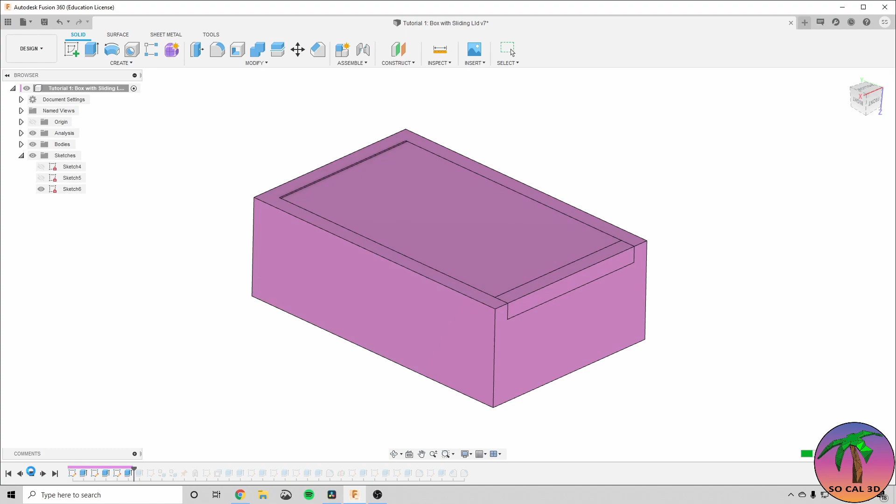That's perfect, because in today's tutorial we will be learning how to design a box with a sliding lid in Fusion 360, no prior design experience required. This box requires no support and prints in a single piece. If this is your first time with Fusion 360, I recommend simply copying and not worrying too much about the details. They will come with time.

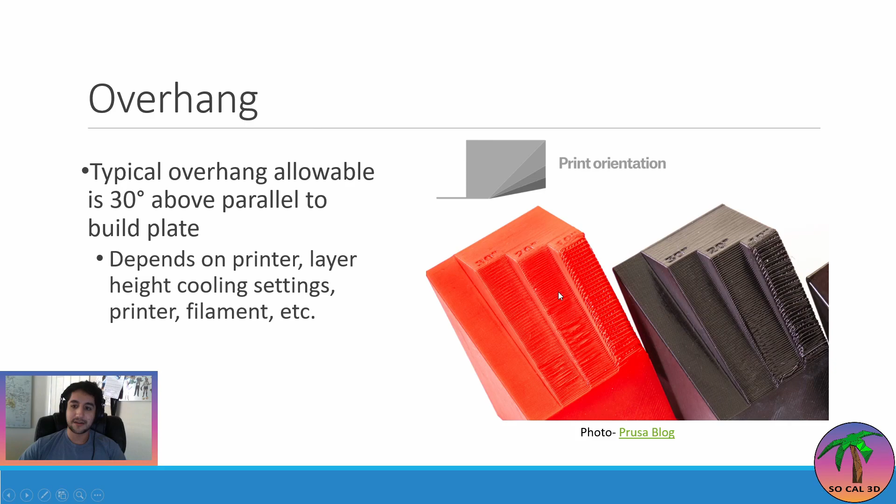In this picture, this is the surface that printed on the print bed, like shown right here. And then we have different degree marks: 45 degrees, 30 degrees, 20 degrees, 10 degrees. A typical overhang allowable is around 30 to 45 degrees. That's going to depend on your printer, your layer height, your cooling settings, and more. But a typical value that I use and try not to exceed is usually 30 degrees, because if we go any lower than that, we start getting a bad surface finish on the bottom side of our prints.

Now, an important concept to grasp is print orientation. Whenever we're 3D printing something, not all directions are equal. Whenever we're designing parts, they usually fail at the layer lines, where one layer of material was put down and then the next layer was put down on top of that. It'll fail at that seam.

So I have a quick question: what direction do you think we should print this part in for maximum strength? Should we put this on the bottom, this on the build plate, or the long edge on the build plate? If you said print in this orientation, you'd be incorrect, and this is not ideal.

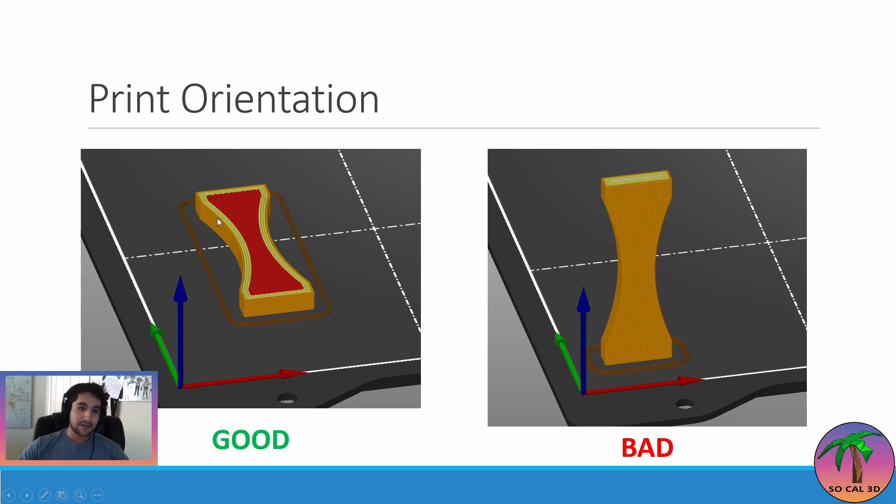Printing it lying flat like this gives maximum strength, because if we were to just bend this with our fingers, this part would be a lot stronger, since we have these continuous fibers running along the entire length, with multiple layers of continuous fibers. Whereas for this model, we have a bunch of layer lines separating, going vertical. So if we try to bend it, it would be a lot easier to break the individual layer lines together rather than however many layers of straight continuous fibers.

All right, so now let's actually get started with designing our box. I'm going to be designing my box for a mask, like a face mask, and the dimensions of the mask when I fold it up really tight are 1.5 inches by 2.5 inches by 0.62 inches.

The first thing we're going to do is go to Change Parameters and actually put this into parameters. So we're going to do the length, 2.5, width, 1.5, and height is 0.62. And there's a few more parameters we're going to want to put in. We're going to want to put in our wall thickness of the box, so we're just going to type in wall T. That's going to be 0.15 inches.

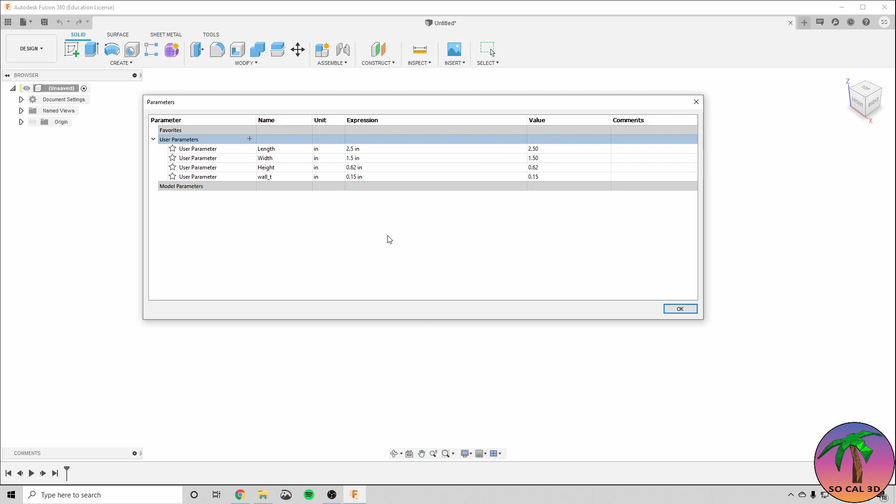And then the last important parameter is our tolerance. This is going to change depending on your printer. Some printers will have a tighter tolerance, some printers will have a looser tolerance. It also depends on a few other factors, but a good place to start is 0.015. We're going to hit OK.

Okay, so now we're going to click on Create Sketch, click on that face, and start with a rectangle. So we're going to want to dimension this rectangle now. We can either click on this button, Sketch Dimension, or hit D. So now we're going to want to put in our length value, which is 2.5 inches.

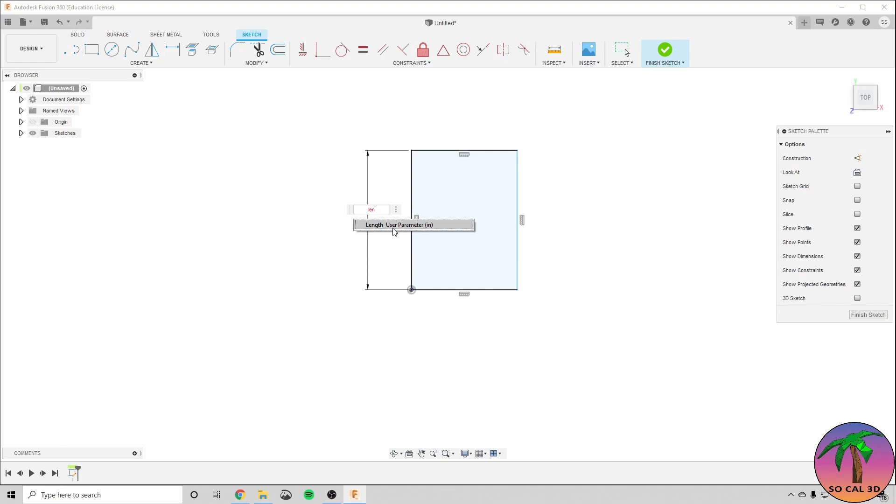So we could type 2.5, but we want this associated to our parameters. So we're just going to type in length, hit enter, and this little FX symbol shows up. That just means it's associated with an equation or something, because you could also add operations into this field. But we're just going to do width.

Hit enter, and that's good. So now we want to add our wall thickness. So we just double click on that to highlight the rectangle, and then we click offset, and we're going to type in wall T for our wall thickness.

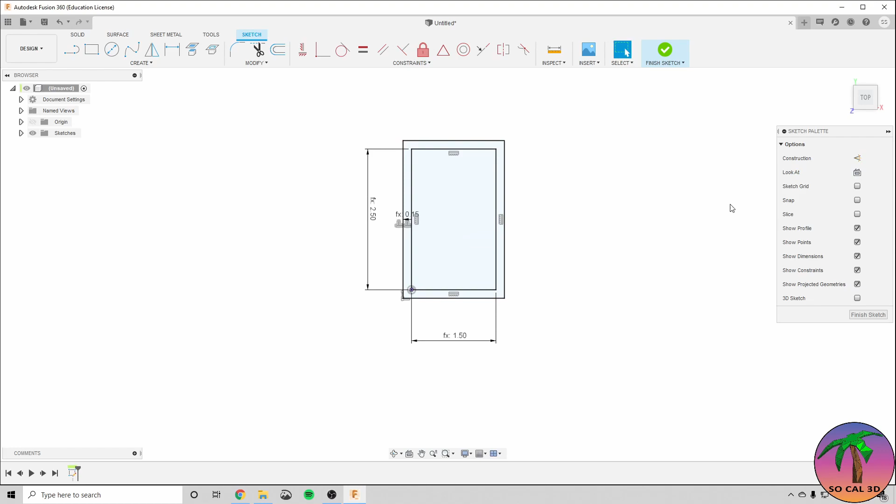Click finish sketch, and now we're going to extrude this into 3 dimensions, and we're going to do height. So the height of our thing. And this is where I said you could do operations. We're going to do plus, hit the plus sign, 2 times our wall thickness, because we're going to have to add a top and a bottom eventually. Operation set to new body, and hit OK.

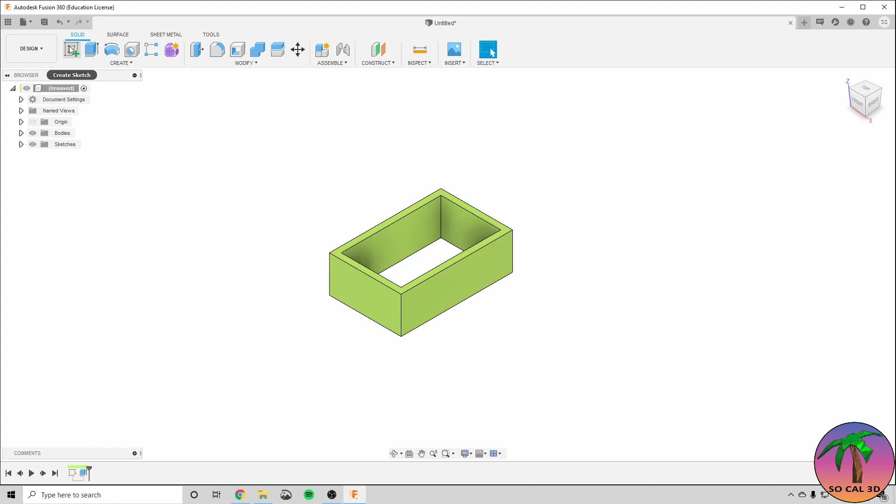Okay, now we're going to add the top. So we're going to click sketch and click on the top face. So we could just draw a rectangle on here, but I like to use project and intersect. And if you don't have the tools right here, if you want to add it to your quick toolbar, you just go under create, project, and these 3 little dots will show up. You click on that and you click pin to toolbar. And we're going to do that for project and intersect, because those are very useful tools.

So we're going to project this top face into our sketch, and that highlights all the edges. We'll just click finish sketch. And now we're going to want to extrude this profile by our wall thickness. And you see it's going the wrong direction. To flip the direction of the extrude, we just add a negative sign. And you see the operation switch to join. That's because it's going downwards and wants to join with our body now. So we hit OK.

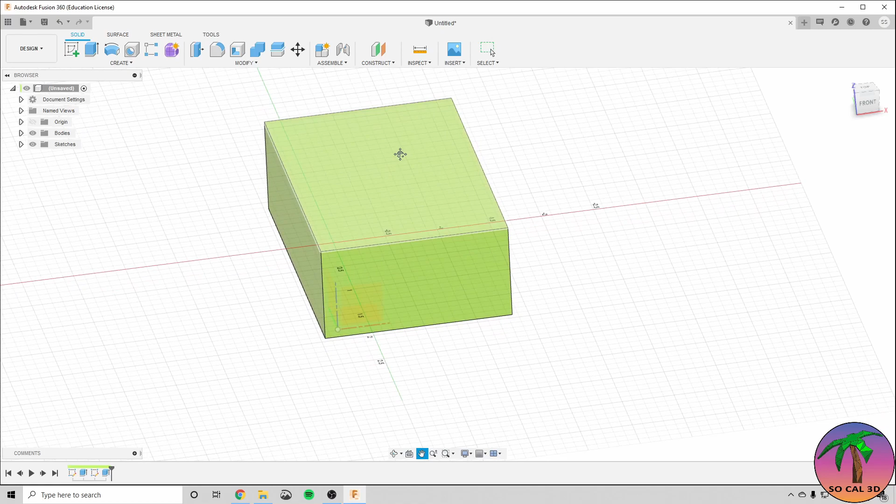And now let's add the bottom lid. So we're going to click create sketch, and we're going to click on this front face. Okay, so we want these 2 edges to be a part of our sketch so that we know where the wall is. So that's why the project tool is so useful, because we can just click on these edges and you see it projects it into our sketch. To look at our sketch again, we just right click, look at. That makes the view normal.

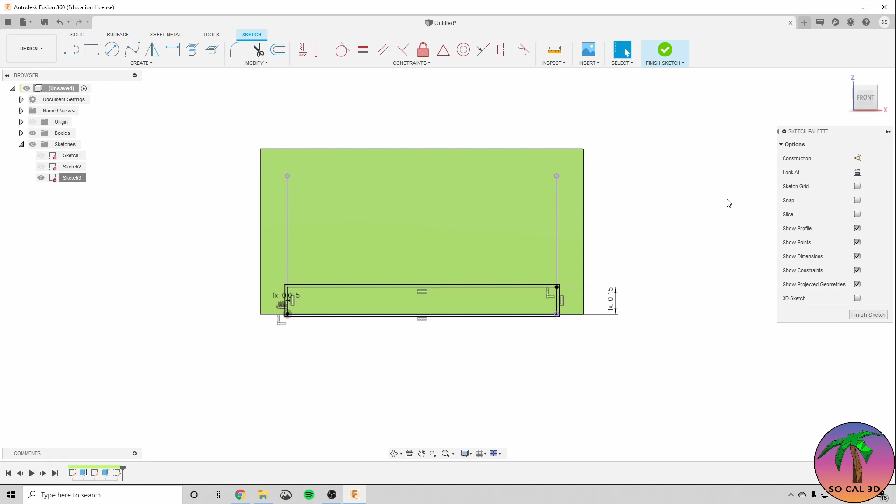So we're going to add in a rectangle right here, and we hit D. This distance is our wall thickness. And now we also want to add an offset so that our lid can slide in the box nicely. So we're going to type tol for our tolerance. Hit OK, click finish sketch.

Okay, so we're going to want to extrude this outside profile and everything else. Extent, we can click to objects because we want it to extrude all the way to this wall. Set the operation to cut, then hit OK.

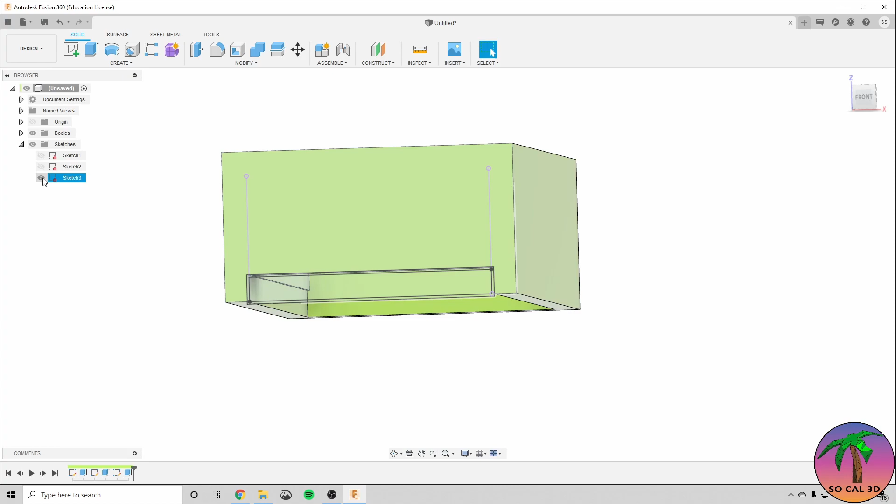Now we want to add our lid as well, so we're going to have to click the eyeball on the sketch to show it again, and then click extrude, and then the center profile is what we're going to want to extrude this time, and then extent to objects. And we're going to want this operation set to a new body because this lid is going to be separate from the box. It's going to print in place together, but we don't want it to be the same body. It's going to be a new part.

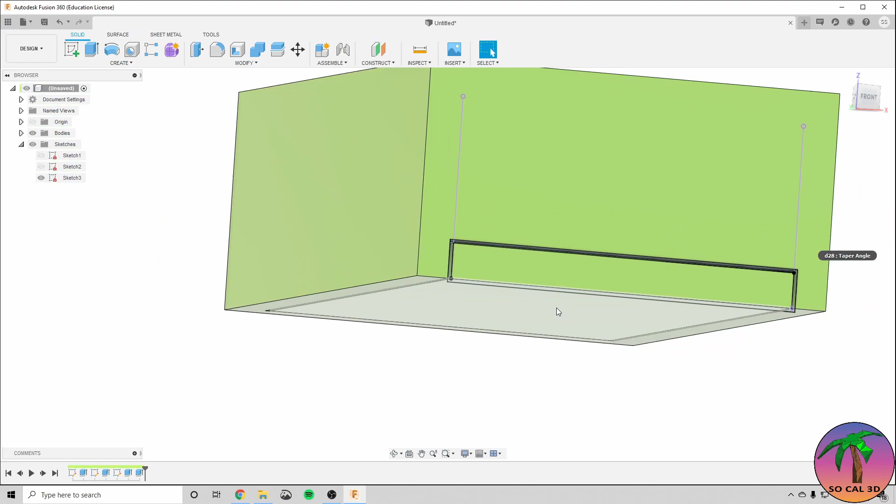So we have the extent set to this face right now, but we want to offset that by our tolerance value. So you can see now it doesn't go quite all the way. And hit OK. And we can hide that sketch. So we have our box and our lid right now.

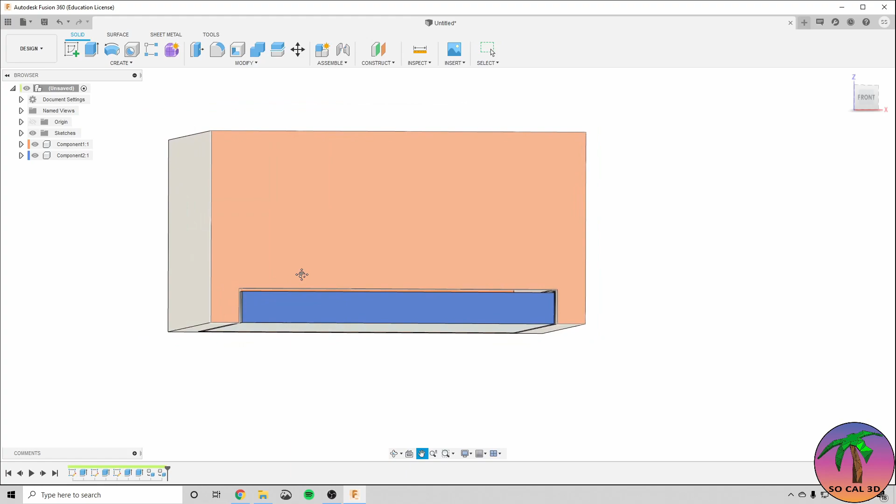It's generally a good idea to make these separate components. So we're going to click on one body and click create component from bodies. Do the same thing for the next one. And right now I have component color cycling toggle on. So to get to that, just click on inspect, and it basically just adds color to your parts. That way you can tell the difference between the separate parts. It's very handy. Now we're going to add the little track or the rails for the lid to slide on in the box.

Okay, so to add the little railings for this lid to slide on within the box, we're going to create a new sketch within the top level design. And just hit escape if you want to exit out of any tools. And you see now that I've created components, we can activate them.

Generally, if you're going to make a feature or a sketch that is associated with both the components, then you would want to do it in the top level design. But say if you're going to add just something small, something minor to only one of the components, that's when you would want to activate the components and do it within the component level.

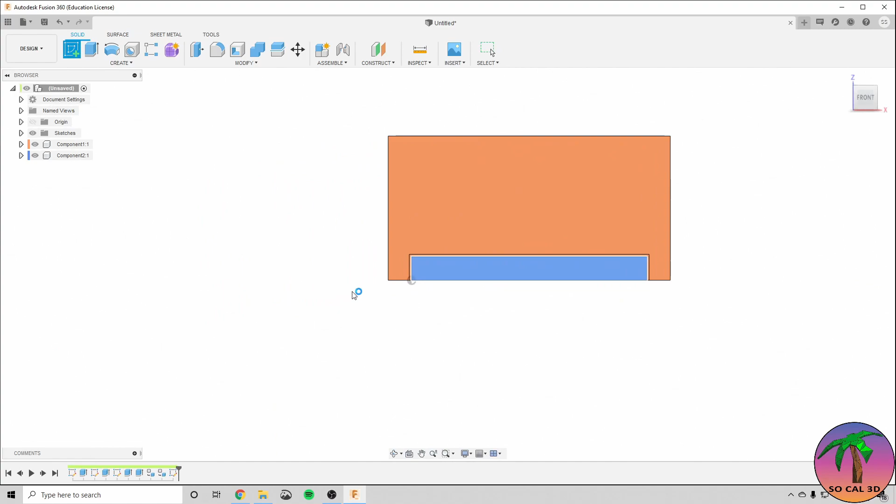So we're going to click sketch, front face, and now we're going to add the little railings for this to go on. Something like that. Now I'm going to create a center line. To do that, you just hover over the line until you get that little marker, that triangle. And then we're going to click on construction because we don't want to extrude this line or anything. We just want to use it for help making the sketch.

So we're going to hit D, dimension this to 40 degrees. Remember the overhang value we talked about, we don't want to go below 30 degrees. 40 degrees is what we want to use right now though. So we're going to make these equal. I just held control, clicked on both of them, and then hit this equal button right here.

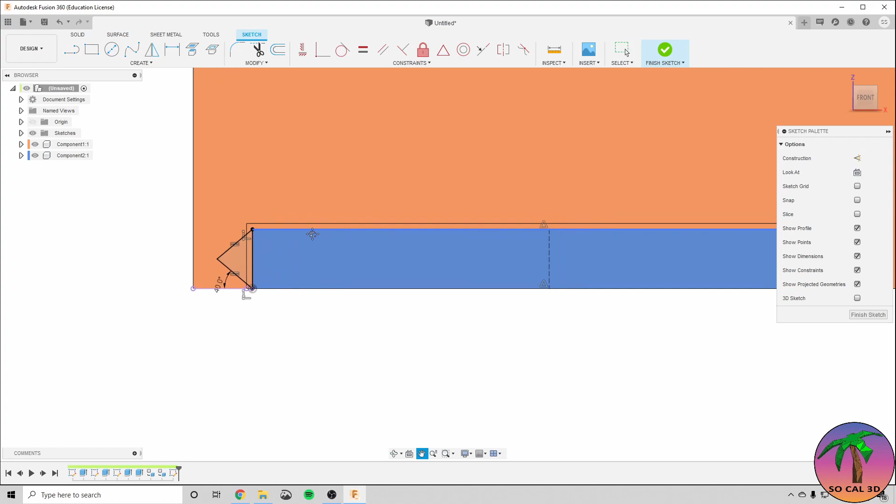So now we're going to add the offset. So just double click and then click offset. Oh, we didn't select this line as well. Then click offset. And this set to tol. And then we want to project this line right here.

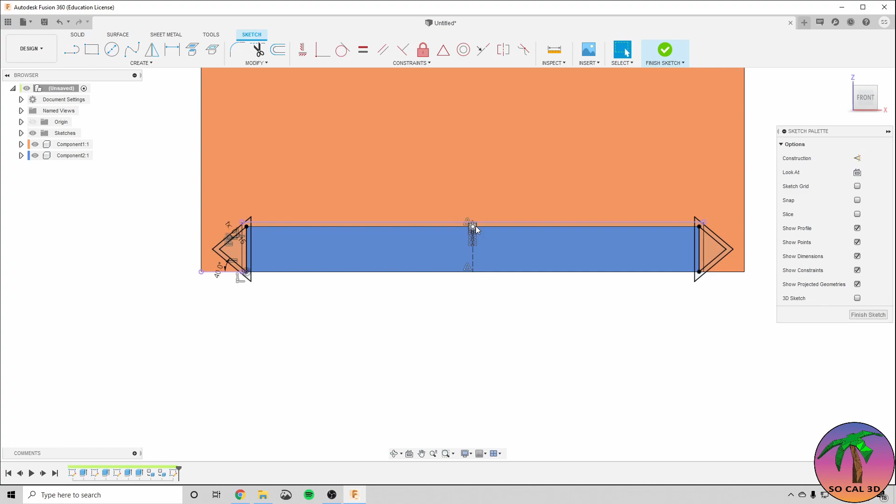And now we're going to mirror this. So we just click mirror, and then we click on our two profiles. Mirror line, and then you see the preview shows up, and now it mirrors all of this sketch geometry across this midplane, or this mid center line that we made earlier. Now we'll click finish.

So now we'll go and activate. Let's actually name these. This is going to be our lid, and this is our box. So in order to name those, I just slow double clicked. Once to highlight, and then another time to rename it.

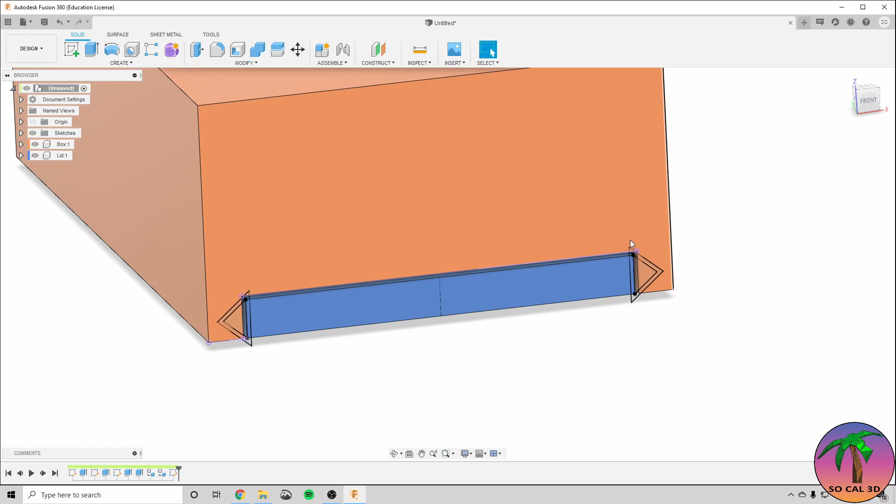So we click extrude. We want to extrude this profile. Oh, sorry, before we do that, we want to activate this, because this is going to be a part of the lid. So click extrude, this profile, that profile, to object, and we want it up to this face.

And the way that I'm moving the camera like this, I'm just holding the middle scroll wheel to rotate, and then I hold Control and the middle scroll wheel button to pan like this. You can also use these tools down here.

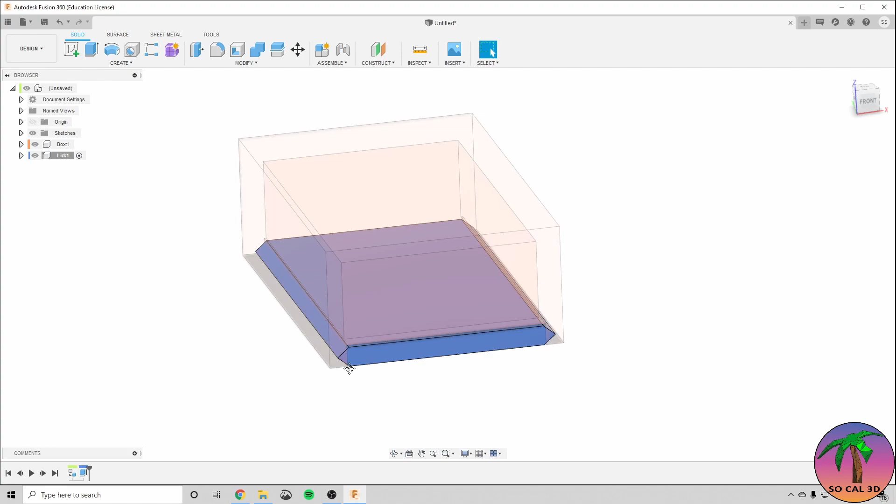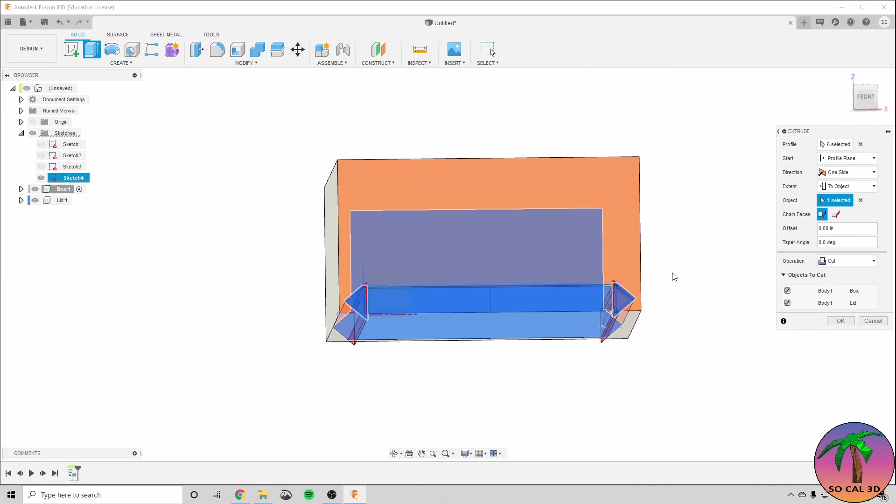Okay, so we're gonna activate the box now, and we want to show the sketch again because we're going to use it again. And extrude. We're going to extrude that. And then extent to object. And so it's kind of hard for me to choose this back face. So I can hold left click, and that'll allow me to choose things that are hidden, because that's the face I want. We set the operation to cut, and then we make sure that we only want to cut the box, so we uncheck the lid and hit OK.

We'll go ahead and activate our top level design again, and there's our box, starting to take shape. So before we keep working, there's a bit of cleanup we need to do. So if you notice, this face is offset. There's this gap right here, and we have this face that's kind of protruding slightly just from that cut operation.

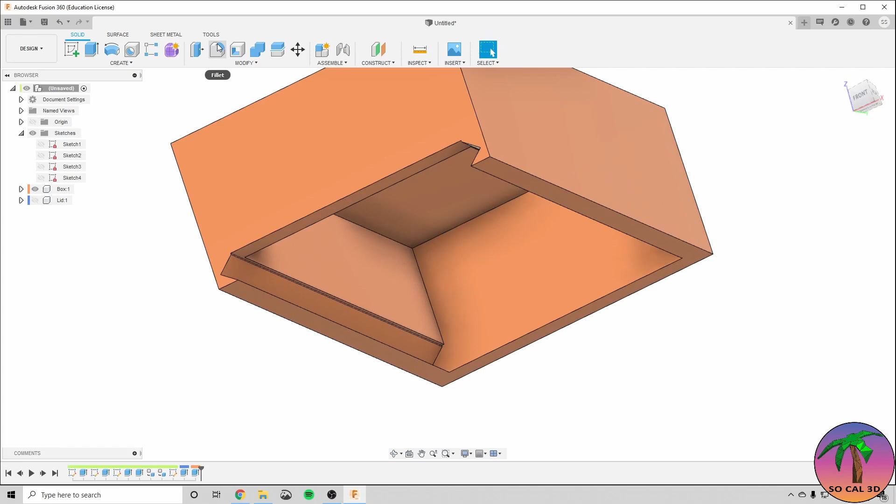So what we're going to want to do to make this flush, we can go to press pull and select on that face, hold Control, select that face, and then we're going to type in our tolerance. Then hit negative in order to push it back. And now you see we push that face back so that it's flush.

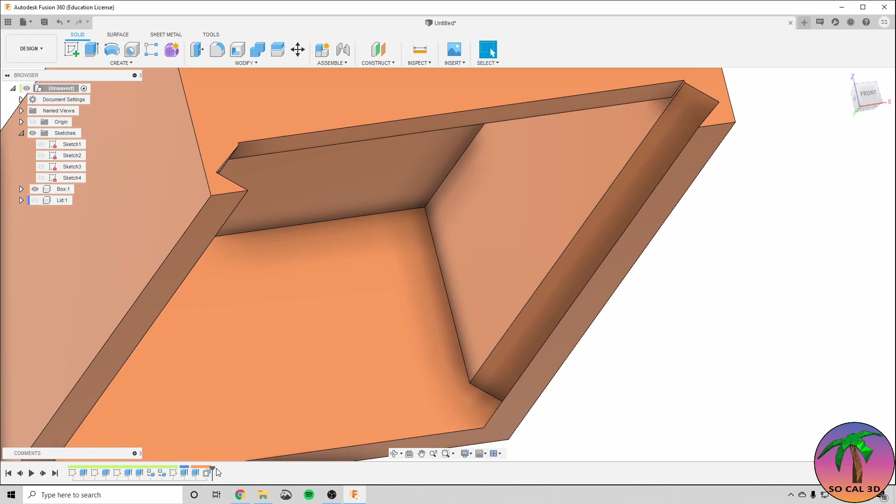Here, to view your changes, you can just drag this on the timeline. So that's how it was before. That's how it is now. That'll print a lot better like that. So we'll show this again.

Okay, so the next thing that we're gonna want to add is the clip that keeps the lid closed to the box when it's closed, so that way it just doesn't slide off on its own. So the first thing we're gonna do is add a midplane. In order to do that, we go under Construction, Midplane, and this will just add a plane basically in the middle of our box if we select the two outer faces.

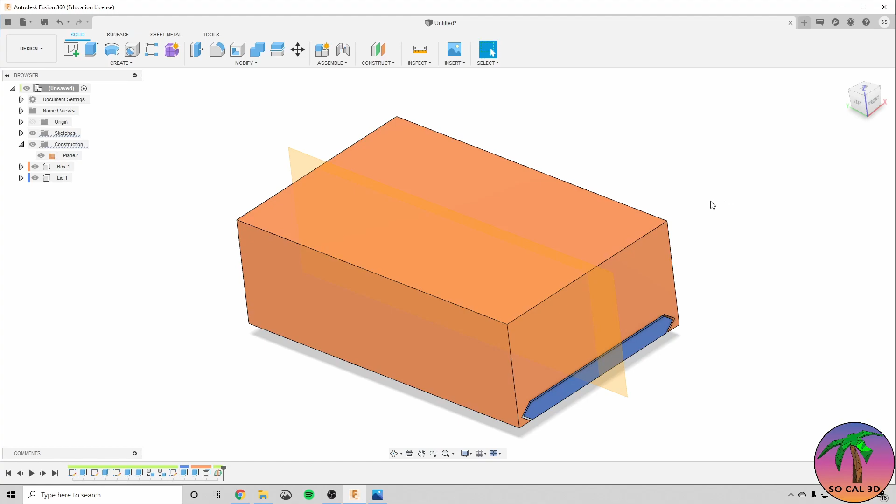So now in order to see our sketch easier, because we're going to want to sketch on this plane, we're going to go to Inspect, Section Analysis, and then we're going to click on this face, because we're going to create a sketch on here in a sec. In order to turn this section view off, you just click this little eyeball right here under Analysis. Okay, so now let's start our sketch here.

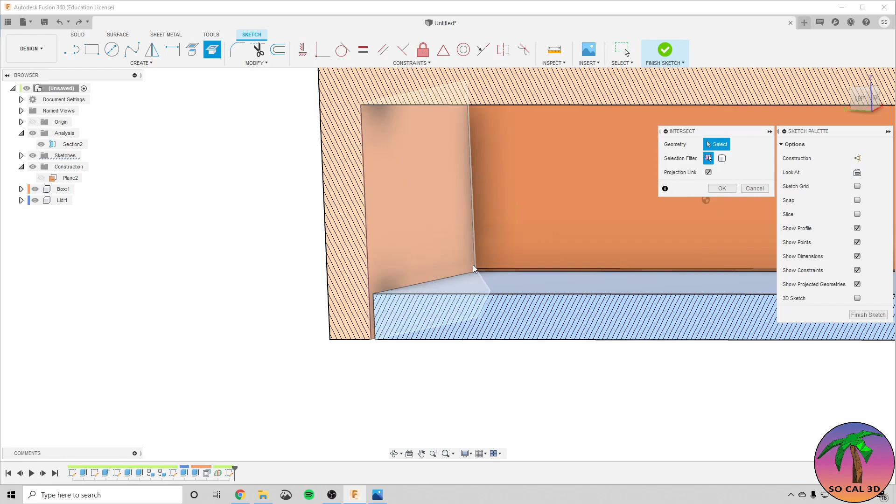This time we're going to want to intersect. So for instance, if I clicked on this face, I only want the line of where this face intersects my sketch. I don't need these 3 points right here. If I Control Z that and instead use project, it adds all these points here where you can see where these are from, but I don't really need that. So that's why I'm going to use intersect for this instance. I'm actually going to intersect this face and this face.

Okay, I'm going to open my sketches, right click, Look At, to make the view normal to it again. Okay, so now I'm gonna start this off at the midpoint, and then draw something that looks something like this. I'm gonna add an arc, 3-point arc. Something like that. And I'm gonna add this bottom line. And now we have this basic little profile that's gonna clip into the box. So now let's dimension it. I want this to be 0.02.

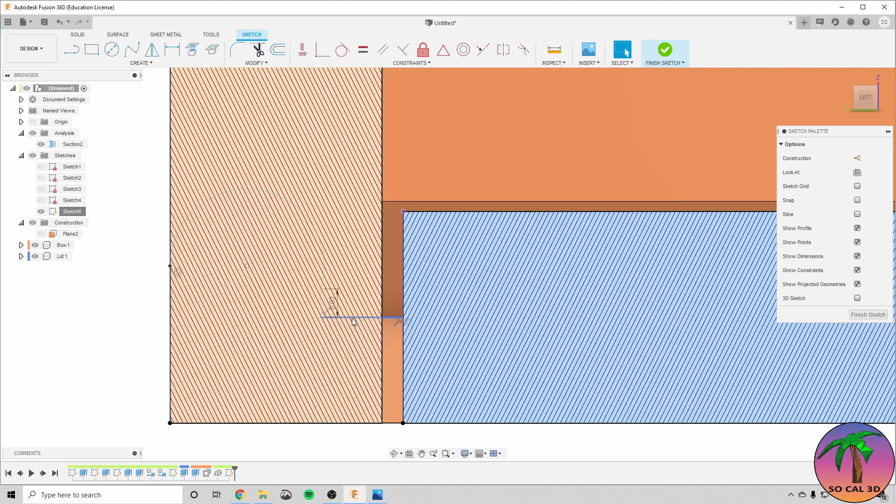I want this line to be half of this line's length. There's multiple ways to do that, but one way I'm going to do it is by adding a point. So we have point right here. It's pretty useful, so I'm going to pin it to the toolbar. You see we hover over it until we get that little triangle. That means it's in the midpoint of this line. So now I'm going to select that point and make those vertical. And that'll make this line half the length of this.

Okay, now just a few more things. We're going to hold Control, and we're going to want to make these tangent. So just click on it like that. And now everything is black, which means it's fully defined. Just drag things if you're not sure if it's defined, and if it is, then it won't move. So we're going to click Finish Sketch. We're going to hide the box.

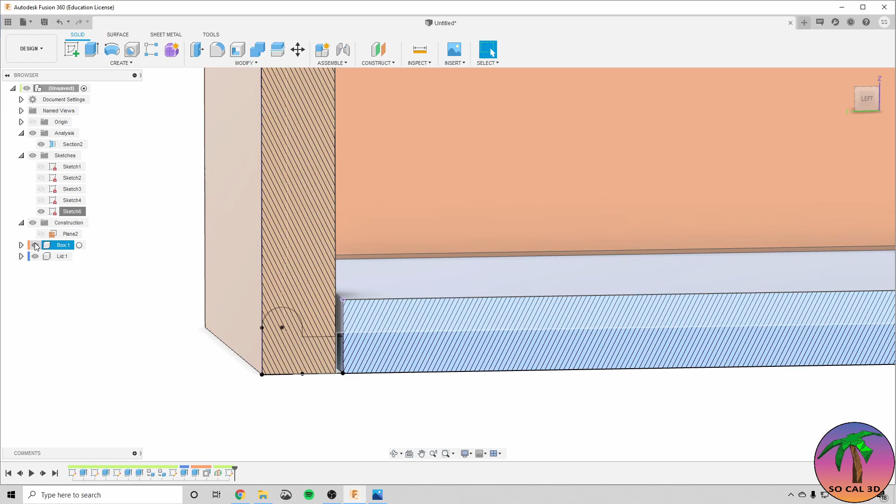And now we're going to extrude this profile. Since this is the midplane, we're going to click Direction Symmetric, and we're going to make this 0.5 inches long. Right now we have half length selected, so that means half of the entire length would be 0.5 inches. But we want the whole thing to be 0.5 inches, so we click on this whole length option. Make sure it's set to join. We can unselect the section view to see what it'll fully look like.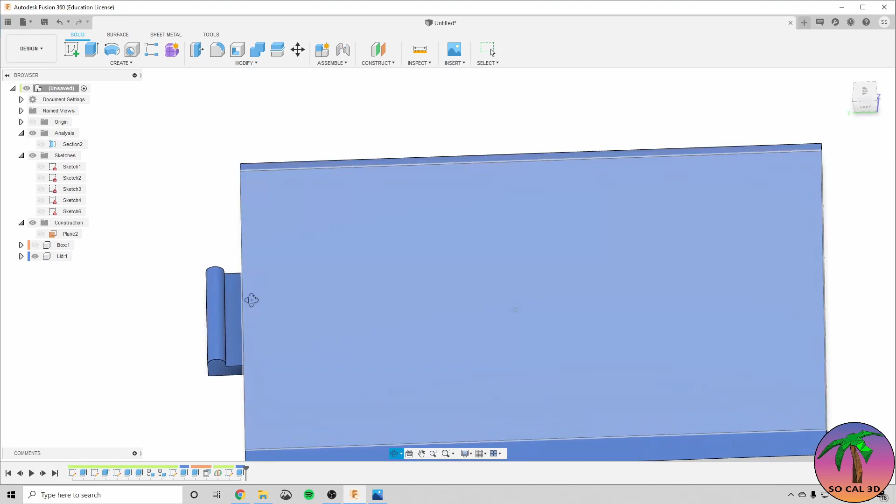That looks good. So now we need this part of the lid to be flexible, and right now it's obviously not going to flex. So we need to add a few features in order to make this part able to flex out enough this way, so that when it's slid into the box, this part will flex down and then it'll clip in place. So to do that, we're going to sketch on this top face. We're going to make sure that the lid is active too. So sketch on this face.

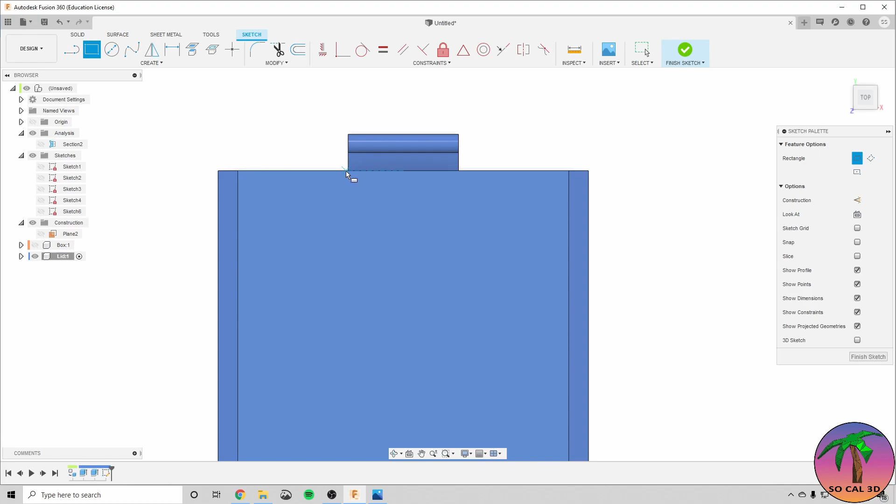We're just going to make this rectangle and then cut it out, because we need the part of this little flap to be thinner. So I'm going to click on that edge and hold Control. And I want those two lines to be collinear. I'm going to do the same on this side. And I want this distance to be 1 inch.

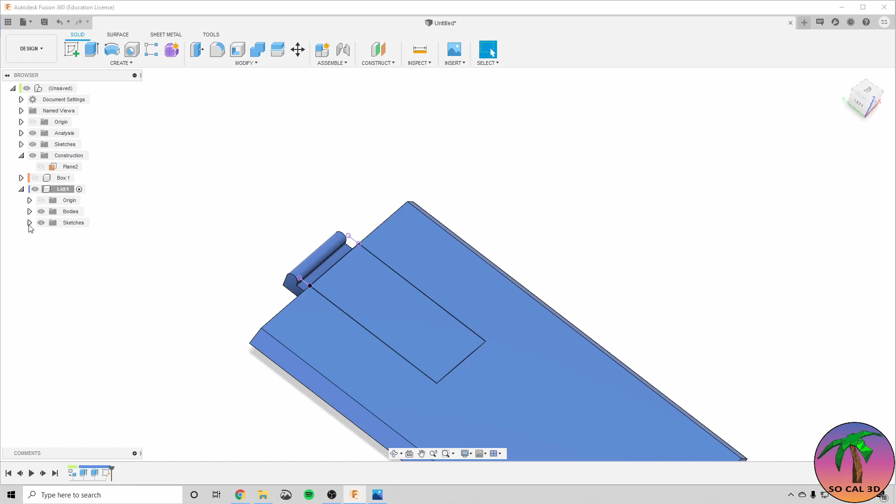I'm going to hit Finish Sketch. And now we want to cut this sketch right here up to this face. So extent to object, operation cut, and we only want to cut our lid.

Okay, so now we only want this to be attached right here. So we're going to create another sketch on here. We're going to create a center line. It doesn't really matter how long your center line is, because we're going to make this value our tolerance. Hit enter. Double click on that newly created rectangle, and then we're going to want to mirror that like that, and finish sketch.

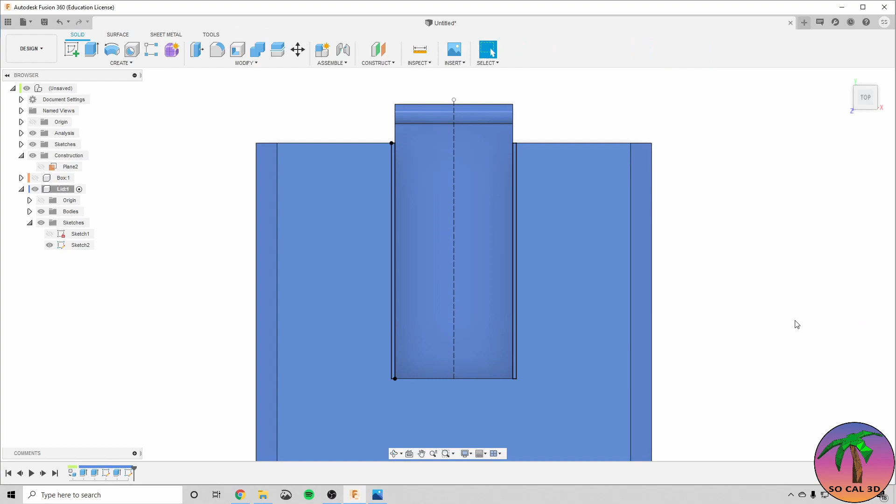Now we're going to extrude these two profiles all the way through. So now we have this little flap that will be a bit more flexible. In order for this to not break, we're also going to want to add a fillet right here. So we click on fillet, click on that edge right there, and see what like a 0.1 inch fillet looks like. That looks good. And we'll just hit OK.

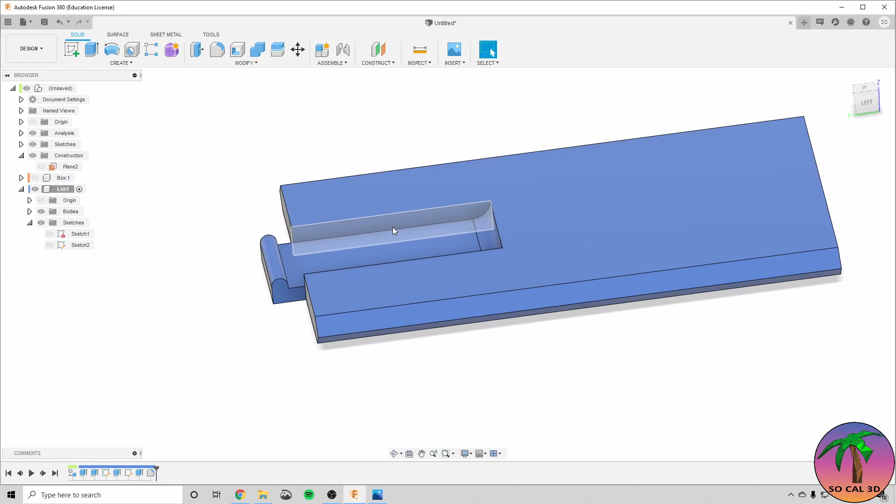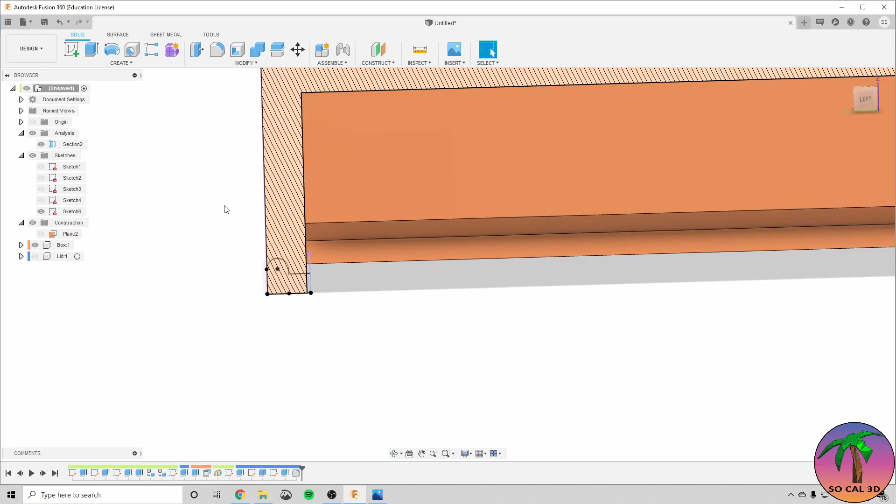Okay, so we're going to show that and activate the top level design. So now we need to add the cutout for the box. So we can hide our lid now. We're going to want to show the sketch again because we're going to use it for our next sketch. We can reselect our section view, and create a new sketch. We can show our plane in order to select it. Click on create sketch on the mid plane, and if you wanted to, you could even name this mid plane.

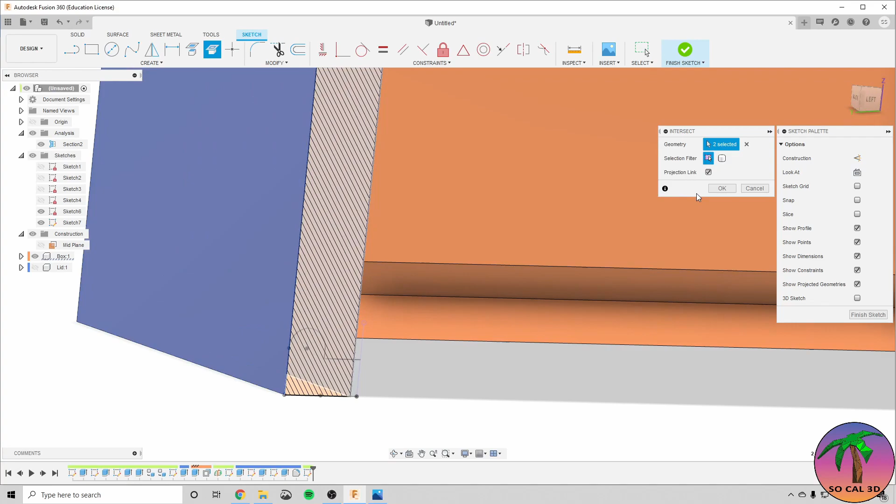Okay, so this is the profile that we extruded before as part of the lid. So now we're going to want to create a cutout. So we're going to intersect this face and this face. And so we're going to basically want to do the opposite. Going to create an arc. So now we have this profile.

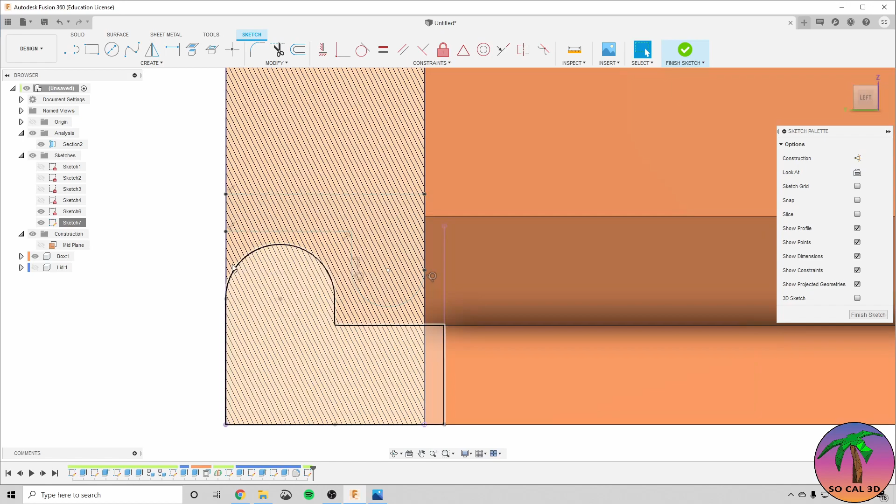So now we're going to want to add our tolerance values, so we're going to have to add a few points. You see we can't really add a point yet because it's part of another sketch, but what we can do is project that other sketch in order to get it into the current one. Now we can hide it. Now we have the outline of that previous sketch. We're going to want to add a point right here, because we're going to want to dimension this to be our tolerance.

We don't actually need that line because what we're trying to cut out is this profile underneath. Okay, so I think that looks good. Everything is fully constrained. We can't drag any points, so that means it's good. We're going to click Finish Sketch. And we're going to make sure box is activated.

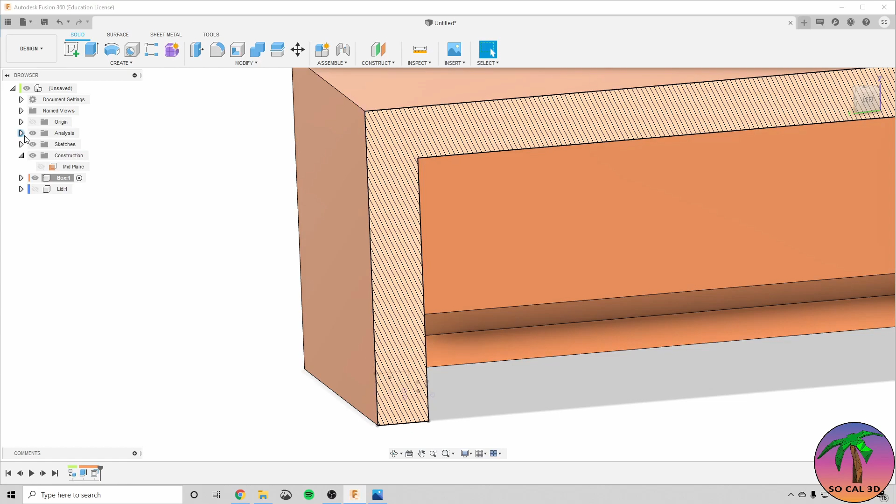And then we're going to extrude this profile. We're going to do the whole length. Actually, what we can do is make that 0.5 inches, the same as before, but then we also need to add plus 2 times our tolerance. We want to make sure just the box is what we're cutting.

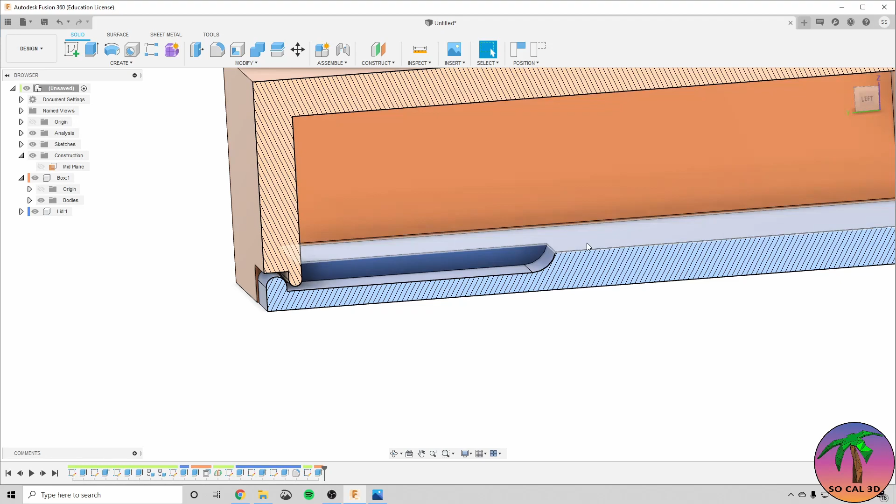So cool. That's kind of how that latch will look, so that when it's slid out, this part will flex and bend out of the way and then snap back in place once it's on the other side. And if you move things around and want to put them back where they were, you just click on Revert under Position up here. Okay, so now I can hide that section view. You see we got the clip right there.

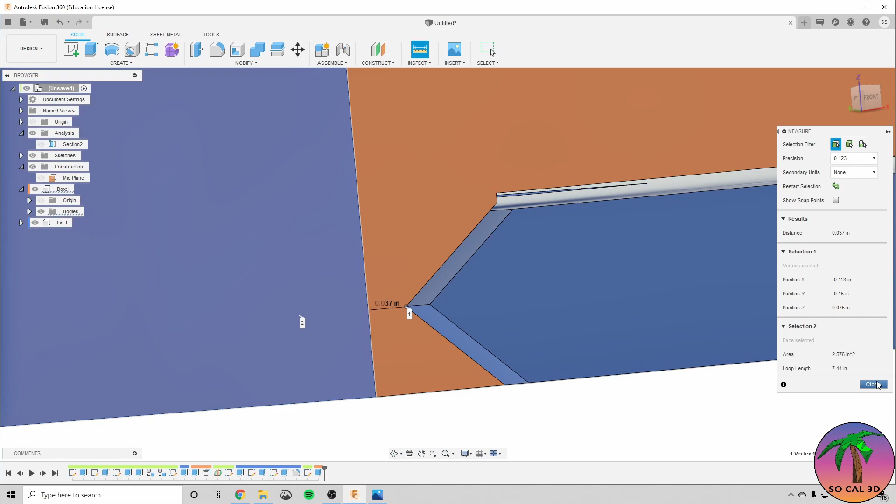Now, when we did this cut earlier, you notice that this distance from here to this wall is kind of thin. If we click on Inspect, Measure, and click on this point, and then click on this face, it'll show us that it's only 0.037 inches. And that's kind of thin, and it might break at that point, so we want to thicken up that area a bit. So this is going to be part of the box feature, so we can activate that component.

We can hide this even, and we're going to create a sketch. So what we want to do is add thickness to this region right here. So what we can do is something like this.

And we want this and this to be parallel. We want this and this to be parallel. So now you can see we have control over it like this way. And then we want to control this minimum distance right here. We don't want that to be too thin, so we're going to set that to 0.1 inches.

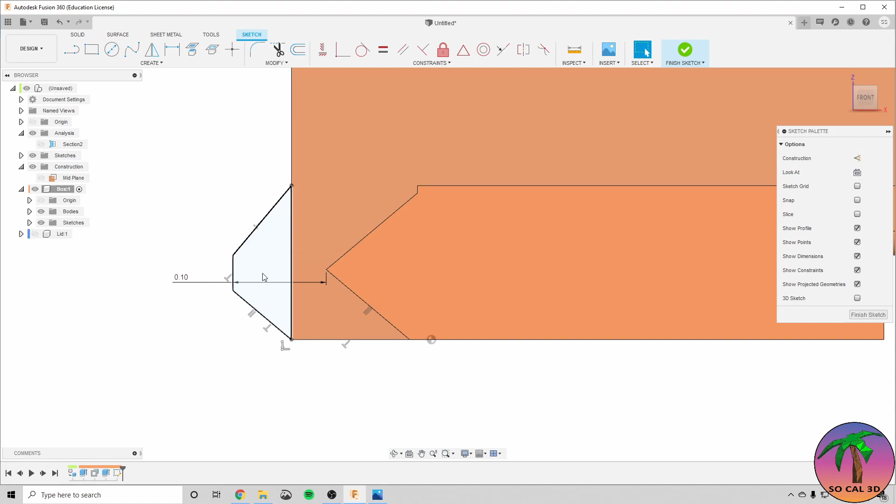You can see we just have just this left to define. We're going to want to make this and this coincident so that this point lies on this line, and that'll fully define our sketch. So we're going to want to do the same thing on the other side. So what you can just do is create a center line, make it construction, and then mirror it.

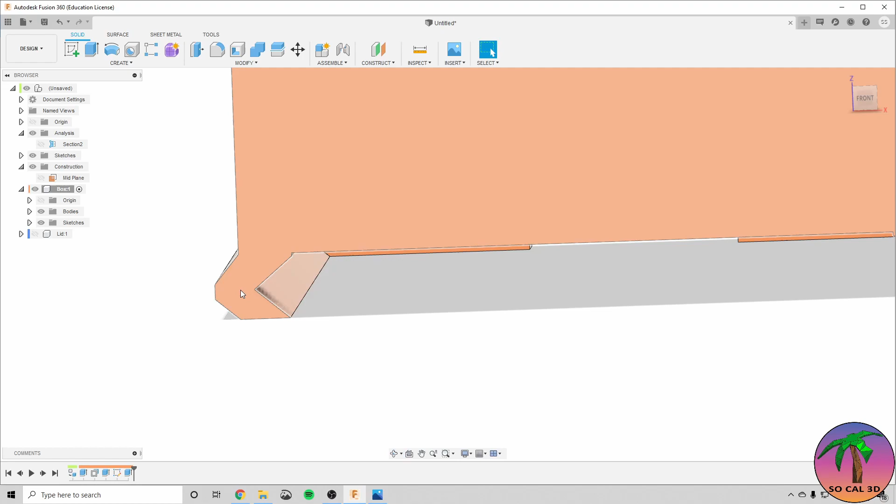Finish sketch. And now we're going to extrude this profile and that profile all the way to the end. So cool. Now we beefed up that section right there, and our box won't break there. Okay, so there's a few more things that we need to do. You don't have to do this, but something that I like to do is to assemble these parts together so I can kind of see how they'll move.

So in order to do that, under assemble, there's joints and as-built joints. You're going to want to use as-built joints whenever the parts are already where they're supposed to be, and use joint otherwise. So we're going to use as-built joint. We want these two to slide relative to each other. So we're going to click our two components, and we're going to click slider. And then for the snap, we're just going to click the front face.

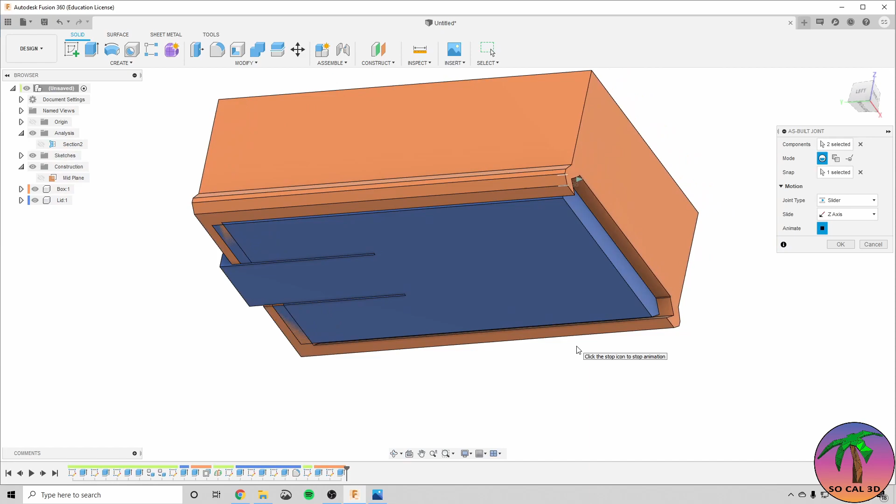There we go. I don't know, I was doing that before. And then to animate it, we can click on preview joint motion. And that's how we want it to move. So now whenever we try and drag this, oops, yeah, see, we don't want to do that. So what we want to do, we want to fix our box first.

So we can right click and then click on ground. So that way we can't drag the orange box. We only want to be able to drag this part. So now it moves kind of like how it's going to in real life. In order to hide this little joint symbol, we just go under joints and hide that. And then we want to also revert this position back to where it was.

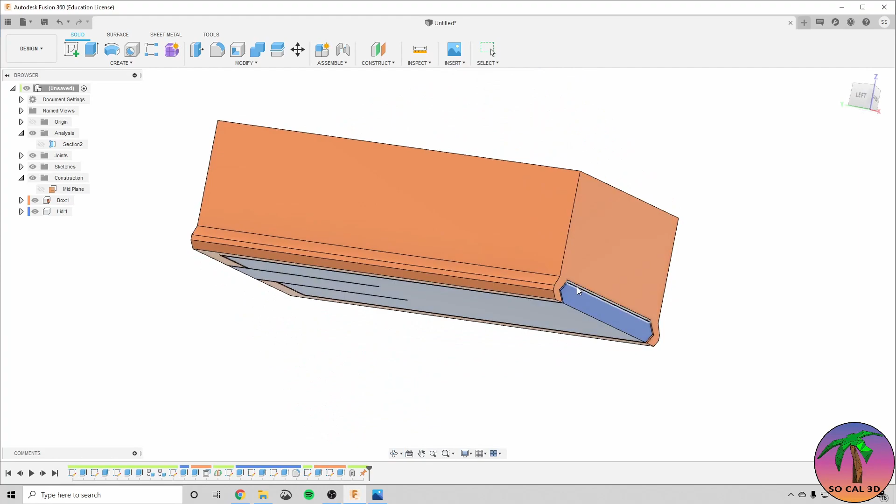Okay, cool. Just a few more details that we need to add before our box is done. So right now, the lid can't slide this way because this face is going to hit it. But it can just slide off the rails this way. So we need to add something in order to address that. What I'm going to do in this situation, I'm going to add little kind of like Mickey Mouse ears right here that are going to catch on the inside of the box to prevent it from coming out. So that'll look a little something like this.

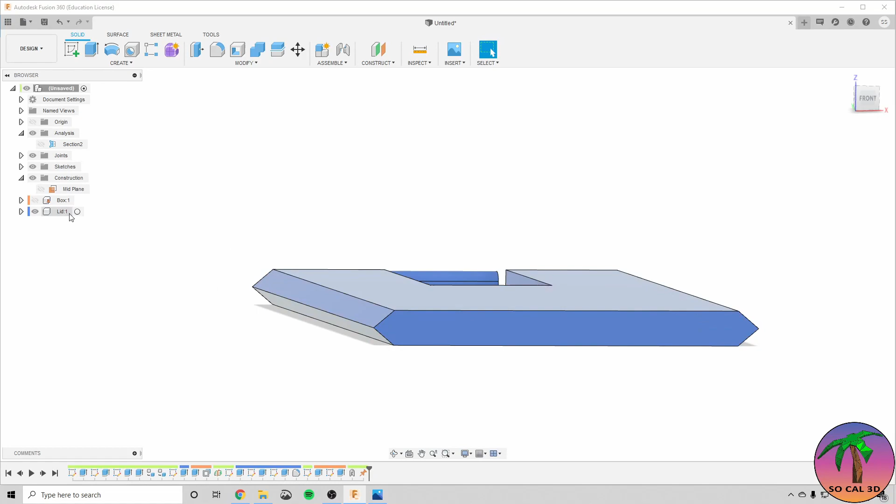We'll start a sketch on this face. We'll hover until this is in the midpoint like that. And we'll create a circle that's 0.075 inches. And then we're going to want to offset that as well for our tolerance. Then create a center line.

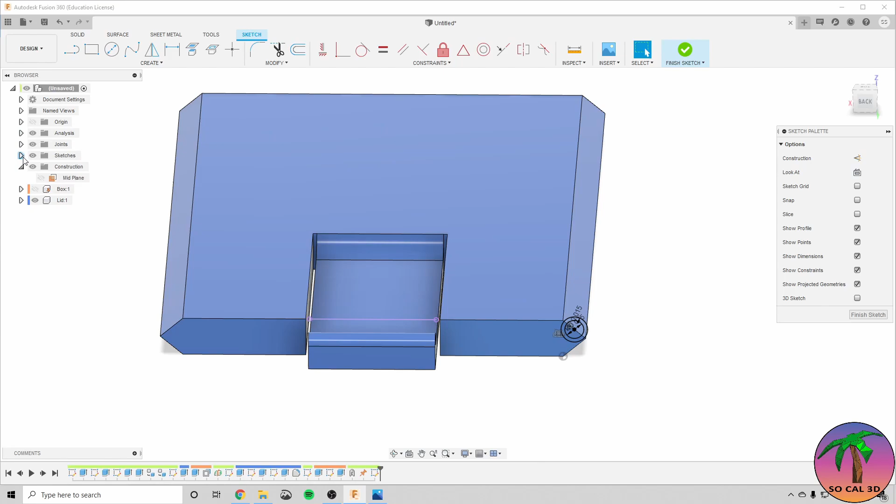What we can do is click on project. Go back to our sketch and right click, look at. Now we can dimension to that line. Doesn't matter how long it is. We're just going to mirror it. You just want to make sure that it's vertical. There, like that.

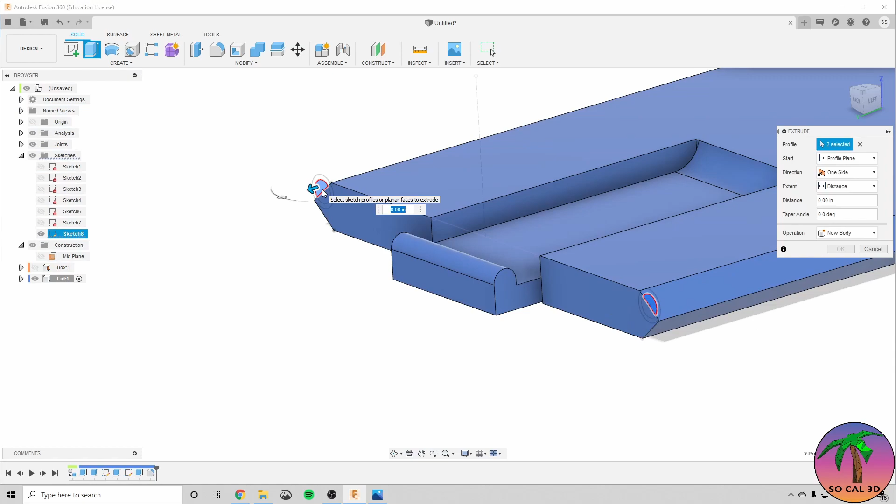So now we want to activate our lid. And we want to extrude the inner profile by our wall thickness. And opposite direction, so we're going to add negative. That's good.

So now we want to show that sketch again. We're going to hide the lid and show the box. We're also going to make sure to activate the component box, and now we're going to extrude this.

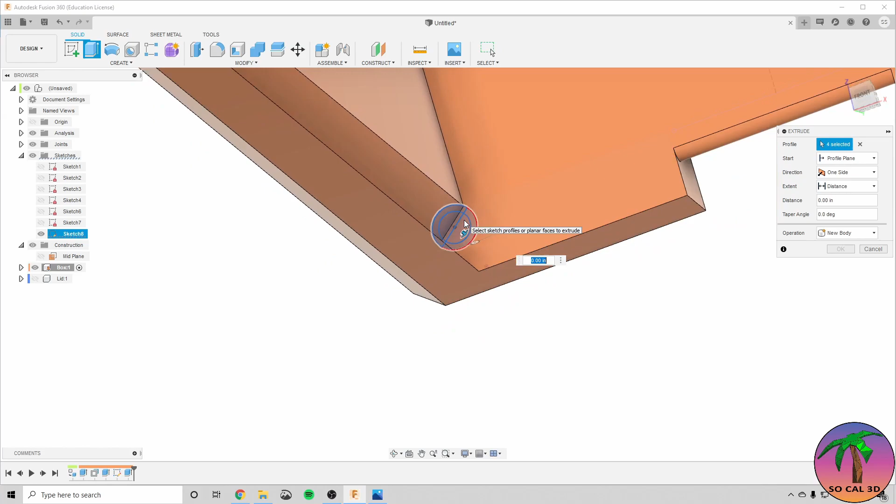So choose the full sketch now. We're going to want to extrude this in two directions because you see it's not quite on this face. So for the first side, for the extent, we're going to click to object and extrude all the way up to this face. And for the second direction, we're going to extrude up to this face.

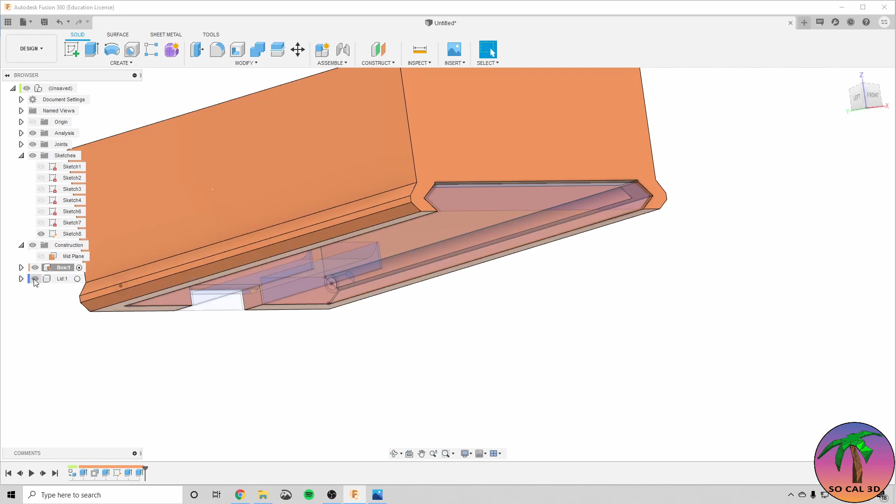So you see that'll block the lid from coming out off the rails now. I'm going to go ahead and activate this again. Can hide the sketch.

So in order to kind of see what's going on the inside of your part, you can go to display settings, visual style, and do shaded with hidden edges, and that'll show the inside of the part, kind of like the edges you can't see from the outside. So you see we have the back of the Mickey Mouse ears back there, and we can see that it'll hit that front face. It'll probably be easier to see if we activate this too.

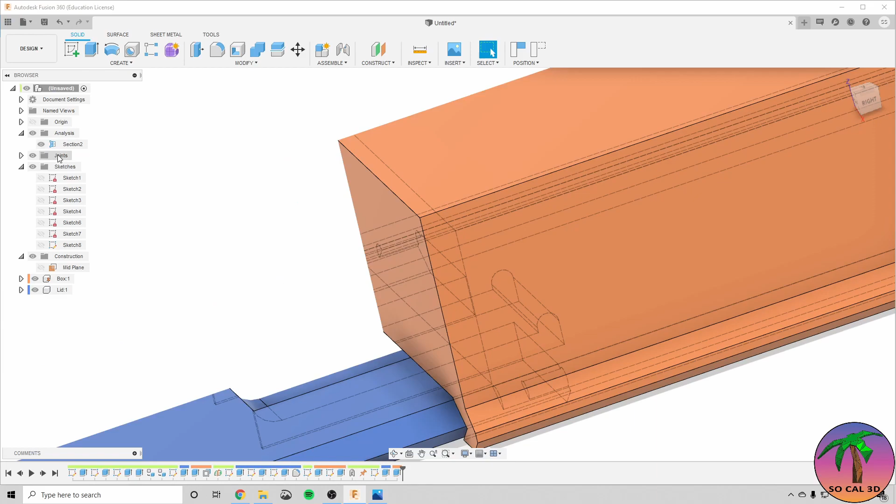So you see there's our little Mickey Mouse ear, and it'll hit right there, and that'll stop the lid from coming off the rails in the forward direction.

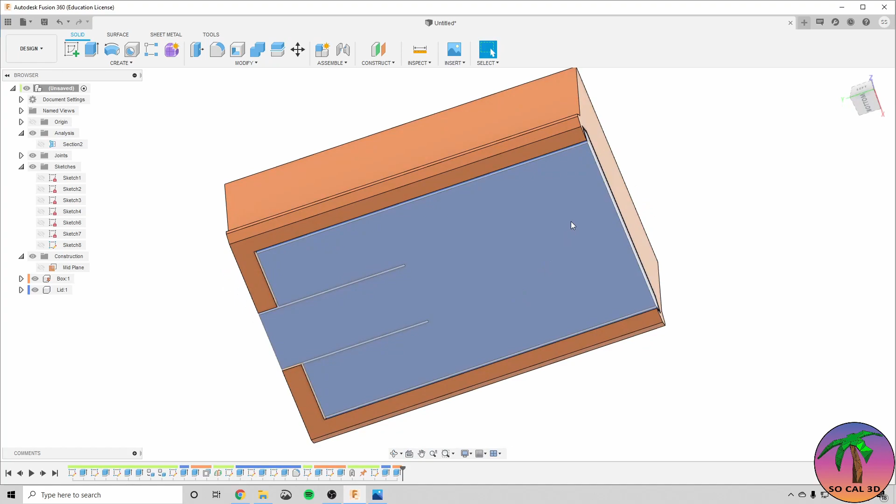Okay, cool, we're almost done, just a few more things. We're gonna want to add some type of thumb cranny into the lid in order to be able to open it.

So that's pretty simple. We're just gonna activate the lid, create a sketch on this front plane, and then start by creating a center line.

And now we'll create a circle, like a cutout for a thumb. We'll dimension this to 0.5 inches. And we want this to cut out like this semicircle, about like this, we want this to go halfway in.

So we can dimension that using construction by just creating this line right here. Make sure it's for construction, and we can just click on this circle and this line and make it tangent, and that will fully define this profile.

We'll click finish sketch, and now we want to extrude this, but we don't want it to start at the very front face. So what we can do is offset the start, we can offset it by like 0.5, the direction. But we want to make sure to select this profile too.

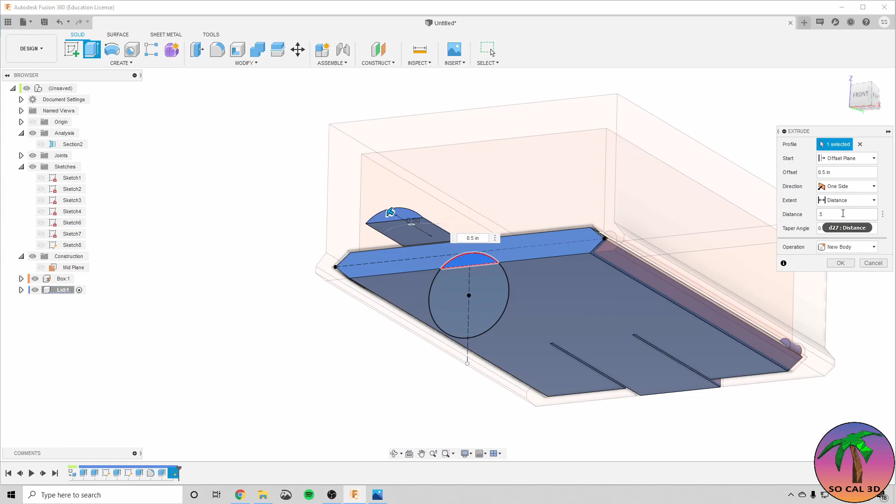Maybe 0.5. Make sure it's set to cut. We have our offset opposite as well, so you're going to hit negative. We have our distance opposite as well, so we're going to hit negative right there. So it'll look like that.

Make sure objects to cut is just the lid. Hit OK. So now we have our little thumb indent that we can pull the lid off of the box with. And now we're almost done, we just need to add fillets.

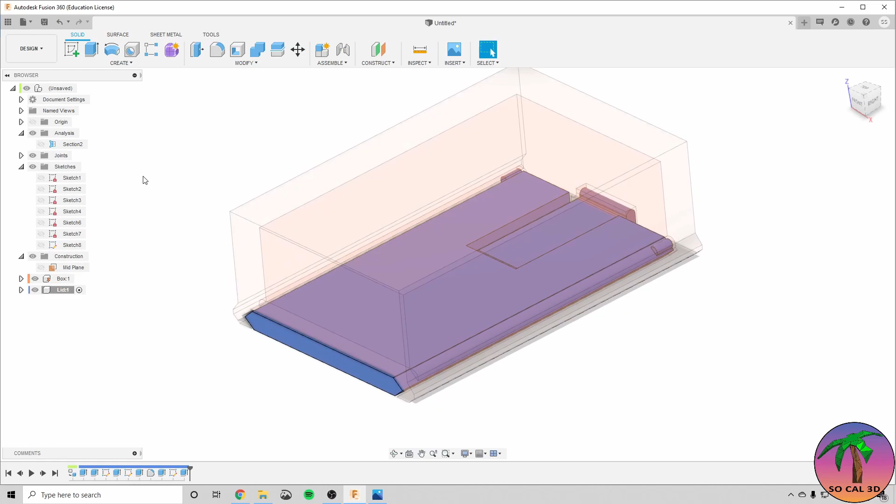So we're going to go and activate the top level, and we're going to add fillets because these can be sharp corners. So we're going to click the fillet tool. We could click like all 4 of these edges, or you could just click the face.

See what 0.1 looks like. We're going to want to add it to, by the way, if you just hold control, it'll unactivate the fillet so you can kind of preview it. If you want to select additional edges, you hold control and select the edge, but sometimes it'll give you slightly weird results.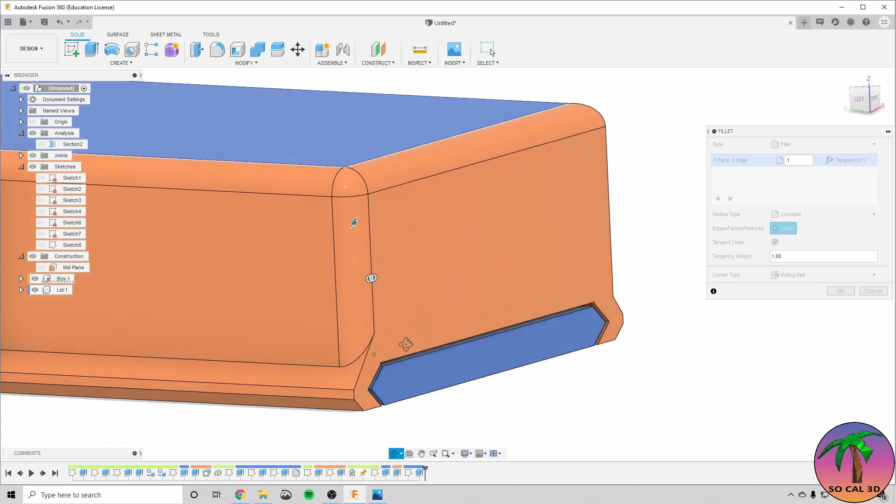So you just kind of play with it till you get all the sharp edges in your model. We'll select this face. So if you notice, if it doesn't give you a preview, then that means whatever you selected is causing errors.

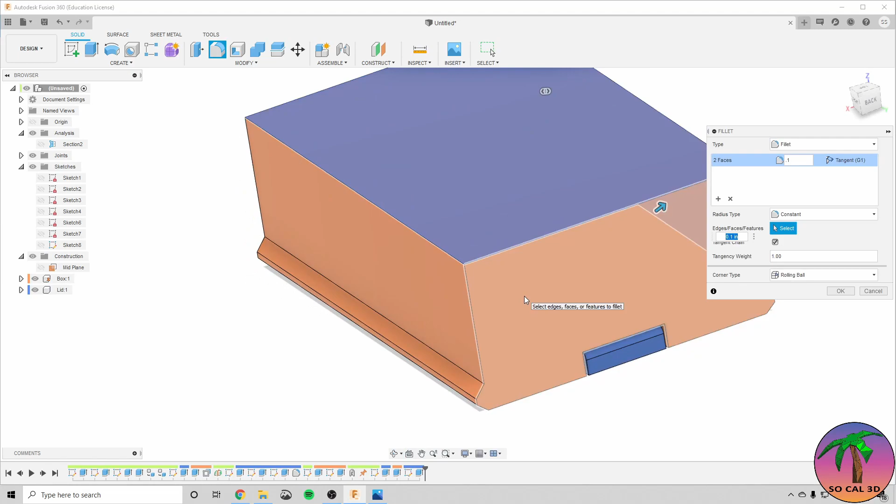So then that's when you would want to unselect it. We'll select this back face. You see it's not, I let go of control and it's giving me errors, so I either need to decrease this fillet value, it's like 0.05, and now it'll solve.

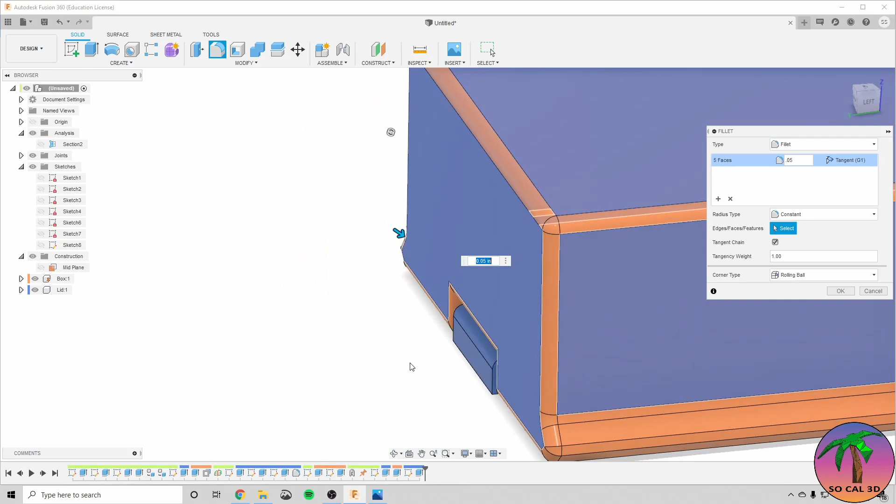So I think that's probably what I'll do. See what happens when I select these faces now. You see it's giving me an error, so it's this face that's causing me problems. I'll just select. Oh, now that's giving me problems.

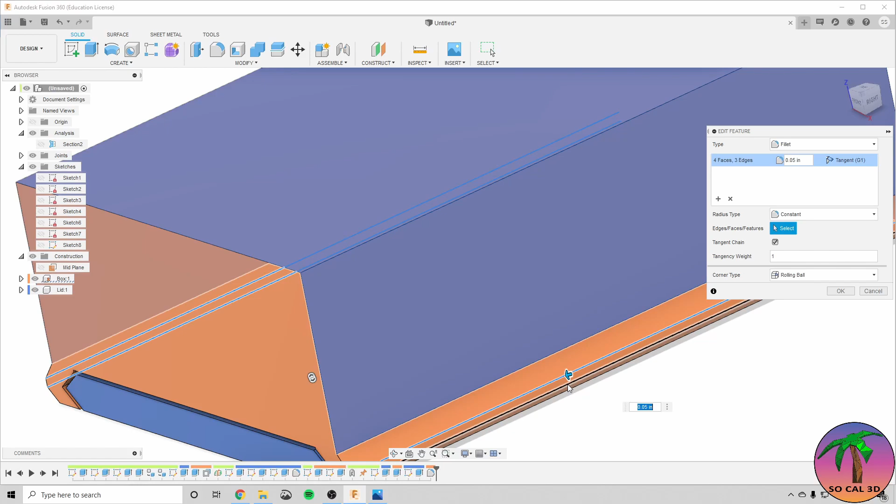Okay, we'll unselect that, we'll just do that for now. It's pretty often that you need to do multiple fillet operations. If you go back to edit feature, maybe if we just select these edges, then I'll be more happy. There we go. No, it doesn't like that edge.

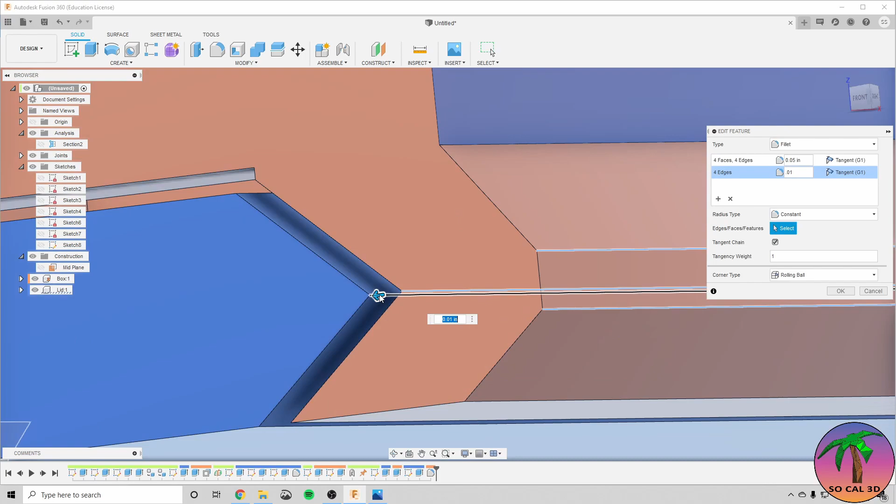We can add more different sized fillets by clicking add selection set, because we want to fillet this sharp edge to like 0.01. You don't have to copy this part exactly, you can do your own fillets. You might need to hide some parts in order to fillet them, but this looks good. You generally don't want to fillet things on the bottom or edges on the build plate, because you want some good contact.

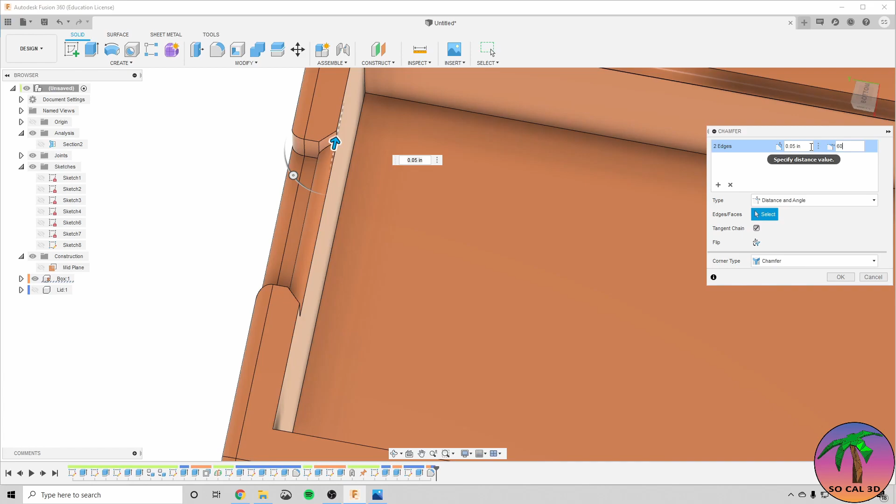I think what I'm going to do is add a chamfer. To add a chamfer, go to modify, chamfer. I want to chamfer this edge and this edge. I think something like that looks good. We'll change this to distance angle so we could adjust the angle. Yeah, like that, something like that looks good. The reason we want that is when this slides in, these corners could get caught, so we want a wider opening so it works well.

We'll click OK, and I think this is looking pretty done. I think this is good now.

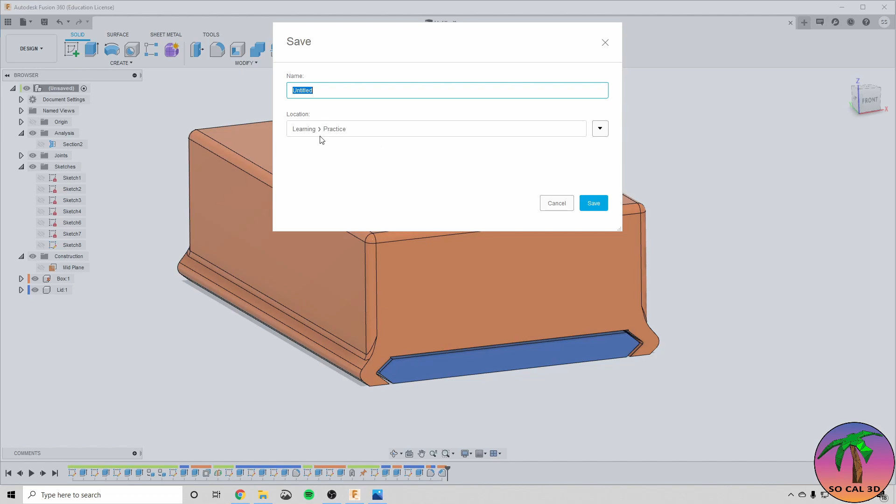In order to actually 3D print your new creation, first thing we're going to want to do is save this. I have this practice file already set up in my projects, but if this is your first time using Fusion 360, you'll just have admin project, default project. You can add a new project by clicking like that. I already made one called learning, and created this new folder called practice, and here's all of my practice and tutorial files. So I just saved this as tutorial 1. Now that we've saved it...

Now what we want to do is save this as a file format that is 3D printable. To do that, we right click and go down to save as STL. Then we have this little dialog pop up. We want this one file. Refinement, set it to high. Don't worry too much about those other options.

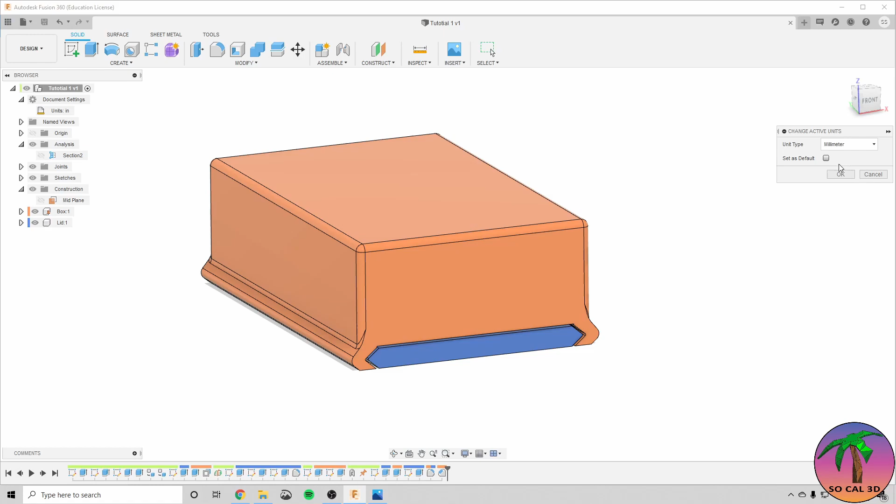Oh, before we do that, whenever it outputs an STL, it uses millimeters as default. So if your units are set to inches, you're going to have to change it to millimeters before you export. It's a big pain, but it's what you have to do to get your file the right size. So set the units to millimeter, then right click, save as STL, and then OK. We'll save this as tutorial 1, somewhere where you can remember.

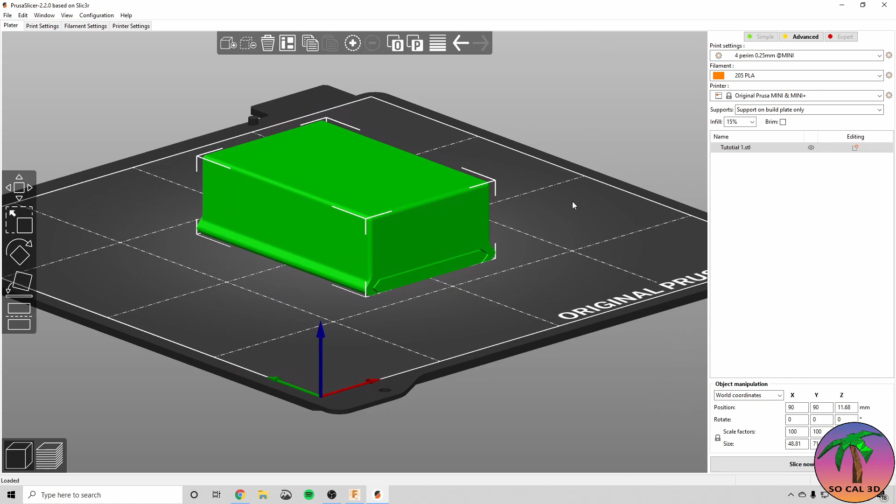Okay, so now we're in our 3D printer slicer. I use Prusa Slicer, but you might use Cura or something else. We're going to add our new part. We want to make sure it's oriented like this, because this is the way it's designed to be printed. A few notes about printing: you're going to want to make sure your first layer distance is correct, because if the first layer is too close, it can squish the first layer together and mess up this distance and fuse your parts. If you're having issues with that, there's also elephant foot settings you can mess around with. Or you might have to change your tolerance value established in the parameters if your 3D printer is fairly inaccurate.

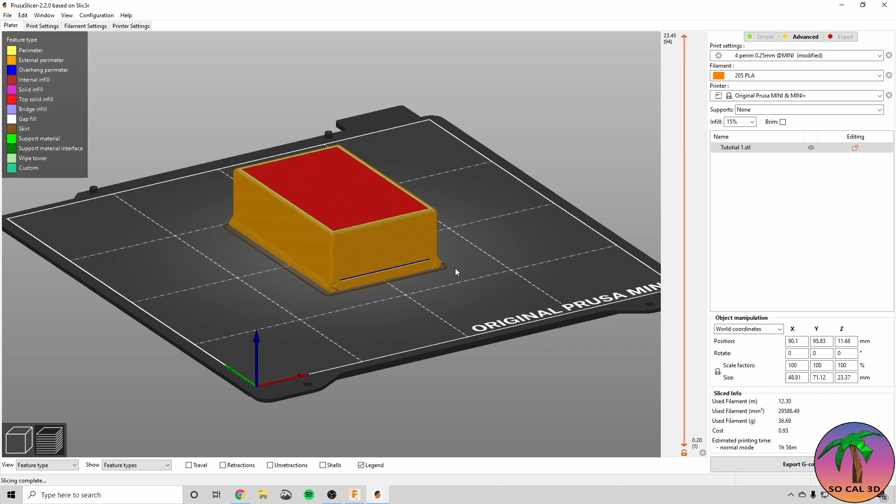This actually needs no supports, so we're going to click no supports. Now we have a preview, and we're just going to double check to make sure none of the parts get fused during printing. I like to do that by going layer by layer. Everything looks good there. I want to make sure this bridge that comes over doesn't get too close. Yeah, it's a few layers above, so that's fine. That's fine as well. So yeah, I think that'll do it.